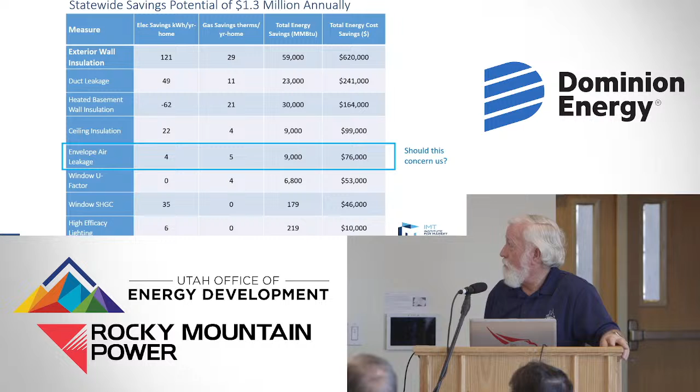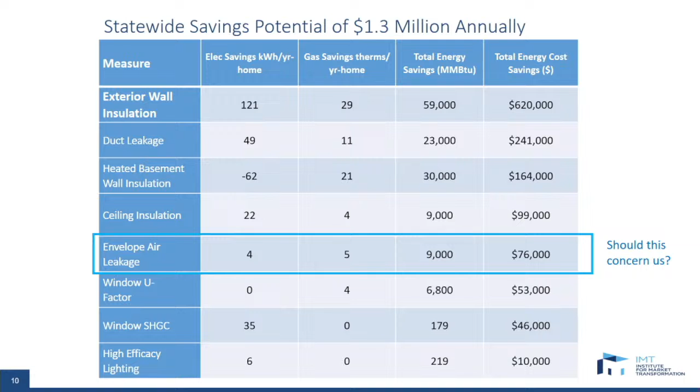That's a big savings annually. The thing I said should concern us is our envelope tightness was pretty tight. We were tighter than expected. So if our envelope's tighter than expected, how should that concern us? It concerns us because we're not ventilating them. We're not blower door testing everything.

There's a lot to it, and I'll talk a little more about that. But let's just say the amendments lessen the chance there's going to be mechanical ventilation, simply by the way they're written. So we're building a lot of houses that are tight, that no one knows are tight. We're not mechanically ventilating them, so we're trapping moisture in the houses. We're trapping contaminants in the house. We have poor air quality. And I don't think after what we went through the last few years that we really want poor air quality inside. I think we want better air quality inside, don't we?

Duct leakage is a big one too.

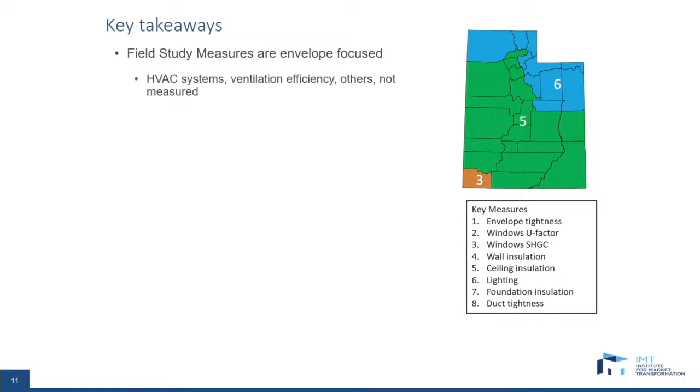So key takeaways: we need to focus. Well, number one, they did not measure HVAC systems or ventilation efficiencies and a few other things. Now, I kind of wish they would have looked at the HVAC more, but it's a little harder to measure and judge how well that HVAC system is performing. It takes a lot more testing and everything.

Exterior walls and duct leakage are responsible for 70% of the total savings, the potential savings.

Windows are getting better. When we first started getting serious about the energy code back in 2007, 8, 9, windows were not that great. We had lots of just clear double pane vinyl glass on the market, and low E glass was a premium. I built a house in '94, and I paid a big premium to put low E glass in that house. Moving forward from 2007, 2008 to now, if you notice the windows you put in today, the standard AMSCO or whatever window, instead of running 0.34, 0.35, is running what? 0.30, 0.31.

And that makes a big difference when you drop the U factor that much. So window technology has improved, it's not because we all did a great job in what we're doing, it's because window technology has improved. And no one even, if you went to a window supplier and said I want clear glass, I don't want low E, they're probably going to charge you more because they have to change production. And those things are fairly good.

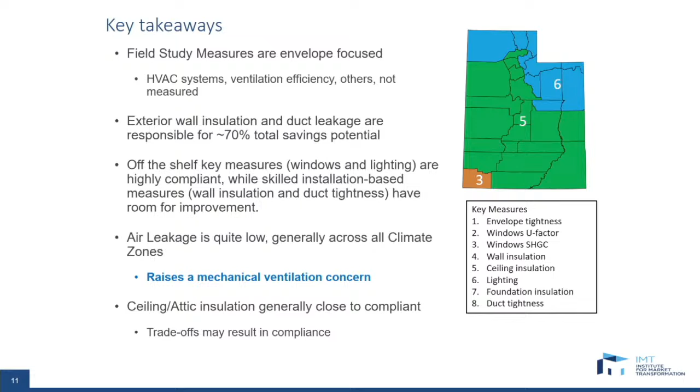Air leakage is low, like I said. Attics are generally close. And basement walls slightly fail to comply. We're just running off the screen just a little bit.

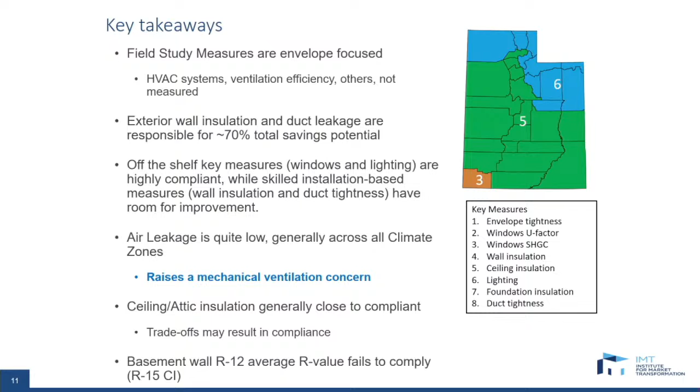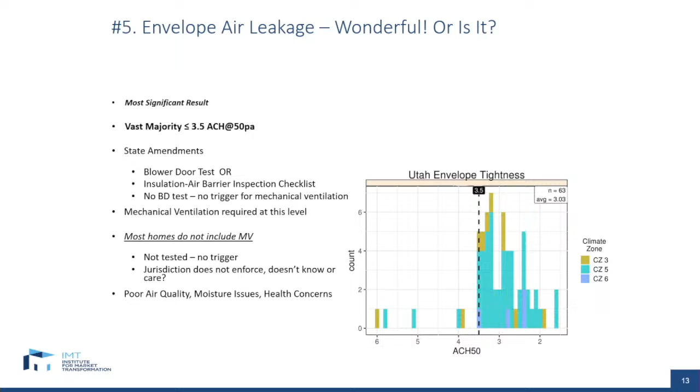The code without amendment, if we were on the 2015 code without amendments, it would say you have to mechanically ventilate at, anybody know what number? The trigger for mechanical ventilation in the 2015 code is 5 air changes per hour. As soon as you go tighter than 5, you have to mechanically ventilate. Our state amendment dropped it down and kind of stepped it down, and we're now at 3.5 is what we have to meet if you blower door test, but the trigger's at 3. So we don't have to mechanically ventilate until we hit 3 or lower.

Well, look, a good portion is flirting with that 3 number, and then a bunch is tighter than 3. How many of those do you think have mechanical ventilation? Don't know.

The code itself has 4 options to comply. I kind of like the energy code because it doesn't say you have to do this one thing. It says you can do this, or this, or this, or this. And in Utah we have a 5th one down at the bottom, and that's the Utah 2012 ResCheck, which allows us to put in that high efficiency furnace, which everybody's kind of doing anyway, aren't they, Ryan?

They are kind of doing that, but there is a problem. Hang on a sec, she's going to give you a microphone so everybody can hear. There's a lot of people doing that.

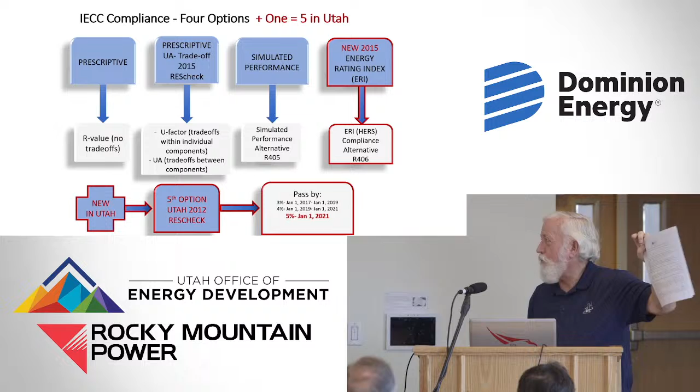So I'm going to real quick, and why I'm doing this, I'm going to grab Jeff's again. If you look at the checklist that I put together, the first thing on it for the most part is which option are we selecting. So before we went to that sheet, I wanted to review these a little bit so they were in your mind when we got to the sheet.

So real quick again: prescriptive just means you meet a table. ResCheck is a UA trade-off. Simulated performance is an energy model. You have the home you're going to build, you have a standard reference design home, you compare the two, and if you calculate that the home you're going to build has energy consumption equal to your standard reference or less, you comply with the code.

But you don't get to trade off a lot of stuff, do you, Jeff? No. And then the ERI, which was new in 2015, you get credit for virtually everything in your house. We're looking at the whole thing as an assembly, not just the envelope, not just the HVAC. We're looking at everything. And then we have, down below that, the 2012 ResCheck.

So just a little more background. The equipment trade-off was in the 2006 Energy Code. You could take that equipment trade-off, and it was in previous MECchecks before ResCheck. You could always trade off for higher efficiency furnaces and air conditioners. That was in the 2006. In the 2009 IECC, it disappeared.

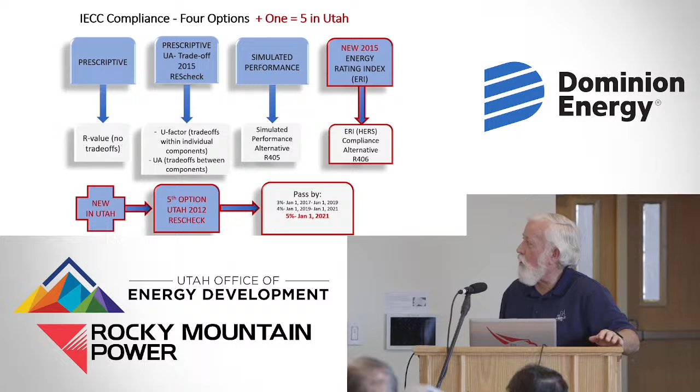So let's just real quick go through each one of these and talk about what each one of them is. As I said, we have 5 compliance options in Utah. The first one's a prescriptive table, and I'm sure most of you are familiar with that, but if not, that's fine too. That's why you're here.

It's simply a table. And if you're in climate zone 3, which is Washington County, St. George area, you just have to meet everything that's there. So it's a 0.35 window, a 0.55 U factor on a skylight, solar heat gain coefficient of 0.25 or lower, R38 in the attic, R20 in a cavity or R13 in a cavity, and R5 continuous insulation on the outside of a wall.

And St. George actually meets that quite a bit because they do EIFS systems where they put foam on the outside. If they put enough foam to get R5, then they actually build a pretty good wall. Mass walls we'll skip over, hardly applies. And a basement wall in climate zone 3, either R5 continuous or R13 in a cavity, and the same for a crawl space wall.

And then we have similar numbers for climate zone 5, which is where we are, and climate zone 6. But if you notice, climate zone 5 requires more insulation, climate zone 6 even a little bit more, especially in walls. So if you pick your climate zone and you build your house and it meets those values, you comply.

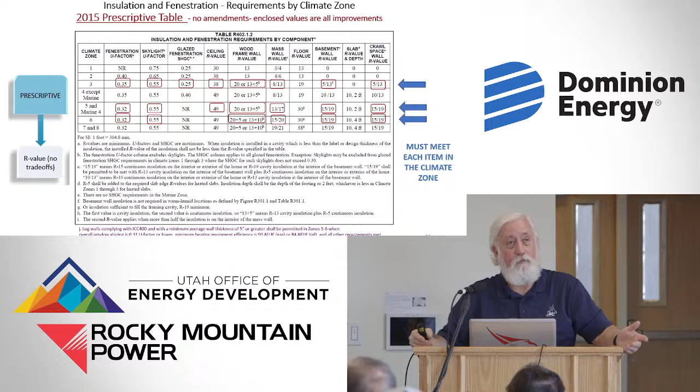The numbers in the 2018 code and the 2021 code are better than these. And so here we are, we're skipping and not adopting, and so the code is getting better, homes would be more efficient, and we're staying back here on this table.

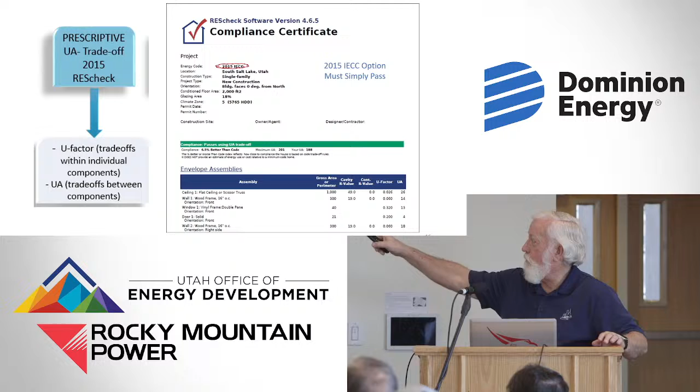REScheck, I think a lot of you are familiar with REScheck. Here's a res check done to the 2015 IECC, which is that option. And you simply have to pass. If you use the 2015 res check, you simply have to pass.

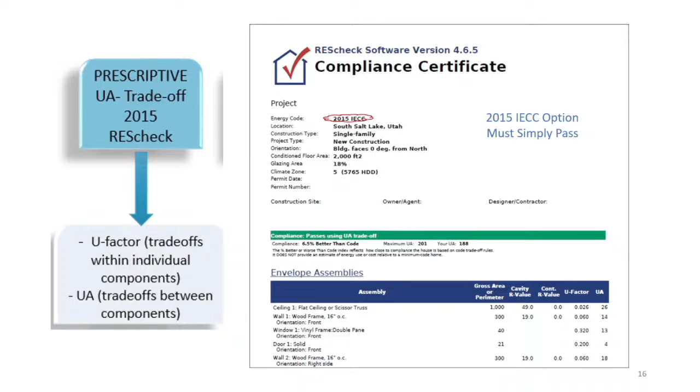The simulated performance, that's that modeling that you do. You just have to show that your energy usage is going to be less than your standard reference.

Now the ERI—how many are not familiar with the ERI? Good, thank you for being honest and candid. I'll bet there's more people that didn't raise their hand that aren't that familiar with the ERI.

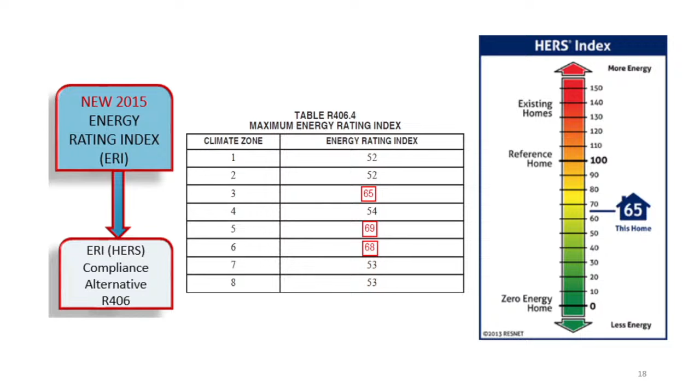It's an energy rating index. Now, when this was added to the code, they wrote up the criteria for this software, what it would have to do. And the only system available at that time that they could use was a HERS rating, a home energy rating system. Is that right, Jeff? So it's a score.

So when I say ERI path, I'm really saying a HERS score, because at this point I think that's the only system we have to score a home. Now, why didn't they just put HERS in the code? Because it's a private company that developed this, and they're not going to put that in there.

I've heard there is another system out there that's very similar that's going to be available, or maybe it's coming online. I don't know if you've heard anything. Well, there's a different software. ResNet, or RemRate, was the software company that did all the HERS scores at the time. Now Ekotrope does them, and a lot of guys are switching over to that, in fact. So there is a second one—there's RemRate, which is the HERS score, and Ekotrope, is that right?

Yeah. And it follows basically the code-identified criteria, so I think the scores should be relatively similar, shouldn't they?

But the beauty of this—I just love this—there are so many advantages. If I had a dream speech, it would be that every home in Utah had a HERS score or an ERI score. It would take all this arguing about the code and kind of put it on the back burner, because if your home had a good score, you'd make extra money when you listed it, because of your home's score.

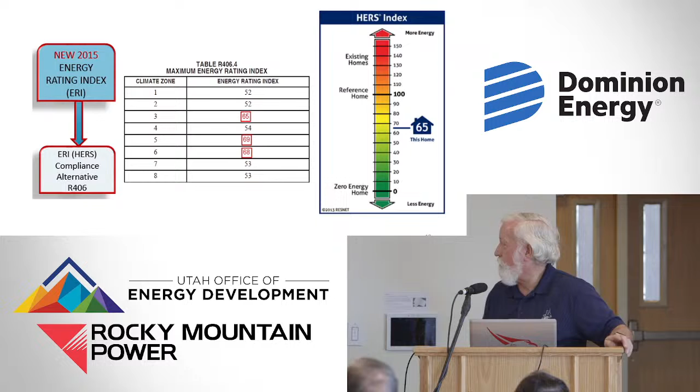So if you choose this, you're building a house, you identify how you're going to build the house, the insulation, your mechanical system, your appliances, and you project what you're going to use. You have Jeff or someone else, a HERS rater, run you a projected rating, and you submit it with your plans. Then when the home is done, Jeff will be coming by.

How many times would you go by for a HERS rating, if you're doing a new home? Well, if you're doing it for Energy Star, you have to do more time, but if you're just doing it for a HERS rating, basically... Hang on a sec, we're going to have you say it in the microphone. For Energy Star, you're gonna be making more trips to the house doing inspections. You have to do insulation. You do have a lot of the same inspections that the municipalities do. But just to get a HERS score, it's not much more than you're doing for code now, which would be duct blast testing and blower door testing.

Okay, so Energy Star's always required you to test all mechanical systems, whether in conditioned space or not, right, which is still a good idea, because we find a lot of leakage in quirky places. Sure, I've got a few builders have me test them all anyway, especially after they suck all the insulation into the return side and fill up the coils on a system that was all inside conditioned space. Right, right. Very good, thanks, Jeff.

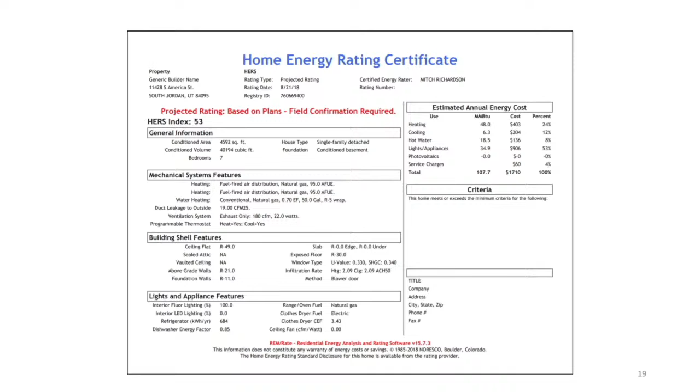Question is, when's this form generated? This form needs to be generated for plan review. So before you submit for plan review, you need to have selected your HERS rater and got him involved. He will generate this projected rating, and it'll say projected rating based on plans, field confirmation required. All this ranting I just went through was to say, we need the plans to actually be based on this, because they are so often not. Does that answer? So this one comes before you submit, then this one at final.

So does that mean every plan has to go through a HERS rater if you're choosing this method, or can the architect verify that this is the intent? Say that one more time so I can repeat it. Or wait a minute, she's got the mic right here. We got people online. Sorry. Before a plan submittal, if you're going this method, does that mean you have to hire a professional HERS rater, or can the architect generate this? If you, plan designer, use HERS, you're going to have a HERS rater for every home. Okay.

I was just gonna say, so for the second report, how does the HERS contractor, or whoever does it, actually verify that stuff? Are they coming to each inspection to see these things as they're being installed? How are they gonna know what's in the walls? They don't inspect insulation, right, Jeff? Well, on a lot of it we do, but a lot more detailed than what a building official would, because we have to actually grade the insulation for, like, Energy Star. If it's Energy Star, yeah, they come out, they grade the insulation, they make sure that it's installed correctly and everything.

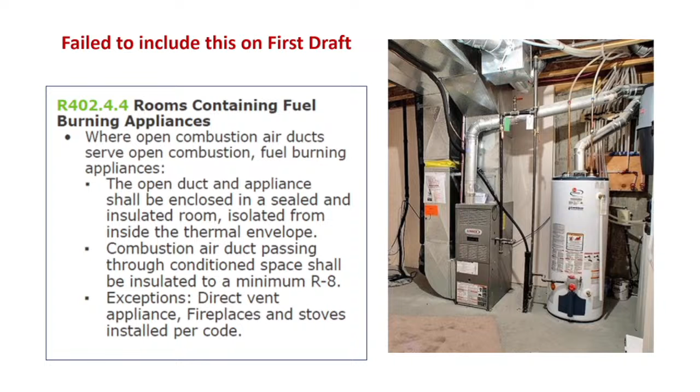I can't believe, did you have a question? Or are you just stretching? Yeah. I admire all you guys. You're the ones that have to sit there and listen to me. I can kind of move and everything.

I wrote this code change. I took it to ICC, I put it in the code, and guess what I did? I left it off my checklist for today. So, what does this basically say? I'm just going to summarize real quick. For years and years, in fact, it goes back into the 80s. I remember Questar, it was Questar at the time. They used to be really involved in our HVAC systems. Brian remembers this probably.

In fact, I would do a system. I put in the gas line, we'd pump it up, test it and everything, we'd leave it on a home. And Questar would come in and disconnect the gas line from the furnace, and they would pump up the gas line and double check and make sure the gas line didn't leak. And then they'd set a meter.

And if the furnace is installed and stuff, they would come in and derate the furnace. Peen the orifices, derate the furnace, take care of everything. They'd do an inspection for combustion air or whatever the case might be.

I still remember I was in a subdivision. I'd done like 8 homes over on 13th East and about 47th South. And they came in, I think this was early 80s, and said you have to put combustion air in everything now. Two of them, high and low, and if it's horizontal, it has to be big enough your dog and cat can go through it at the same time.

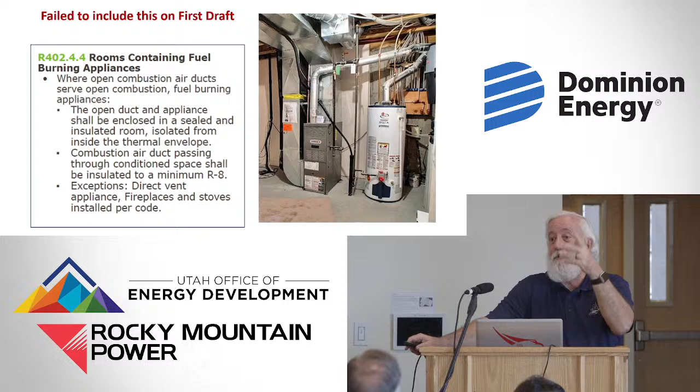If some of you have an 80% furnace, you know what you have to do: go down, take the little rod out, polish it up with a Scotch-Brite or something, put it back in, and your furnace runs fine. It's because it's getting contaminated with the crap you generate in the house, especially laundry stuff, detergents and dryer stuff, fabric softeners.

Just make it direct vent. Guess what? If you put in a direct vent furnace and a direct vent water heater, and you put in a 700 CFM range, and we adopted the current code, you don't have to put makeup air in for your range hood. The whole reason we have makeup air for a range hood at 400 CFM or greater is because you backdraft the B vent, and it's dangerous.

If you put in direct vent appliances, you don't have to deal with that. Now, your range hood's not gonna work real well unless you crack a window or something, if it's a big one. But combustion safety is paramount. Plus there's rebates. Plus there's rebates.

And while I'm on it, I'm gonna jump on the next soapbox. Builders, HVAC people, please, please run the second pipe. If it's a direct vent, install it direct vent. Install the combustion air pipe coming in. Don't draw from inside.

Climate zones. How late are we supposed to go? We might finish early. Anybody gonna care if we finish early? Yeah.

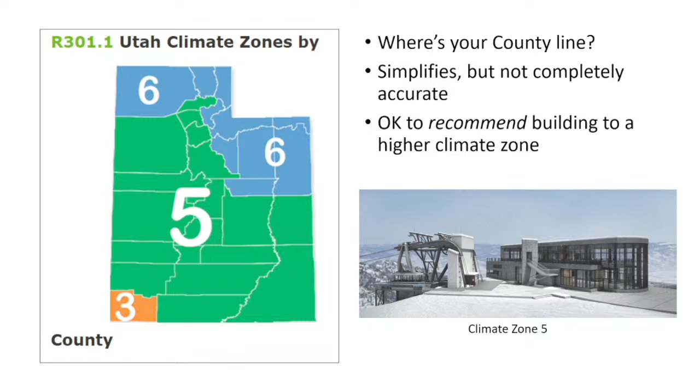Climate zones in the 2021 code change. Up in Box Elder, Carbon, and was Cache one of them? Or did Cache stay climate zone 6? Anyway, three counties moved from climate zone 6 to climate zone 5 because historic weather data shows they're a little warmer than they were before. And so they changed. Hasn't changed for us because we're still on this code.

Now, I worked for Salt Lake County. I worked for Salt Lake City for a little bit, but then Salt Lake County. And we did a job, this building. We inspected this building. Anybody know where that building is? Top of Snowbird. You probably went out there, didn't you, Mark? Or were you not working there then?

It's 11,000 feet. What climate zone is it? What climate zone should it be? 7.

In fact, the Utah County line is that way, and is it Summit? Yeah, Summit County, within a couple of hundred yards of that building. It's the same as Sandy, that climate zone right there. Same as right here. It's our climate zone.

It's Salt Lake County. Now, should we change it back to how the climate zones, the 17 climate zones or whatever it was in the 2003 code? No, because it was so cumbersome. No one enforced the code because it literally changed with the street, you know what I mean? It's based on heating degree days and cooling degree days, that's where your climate zone comes from.

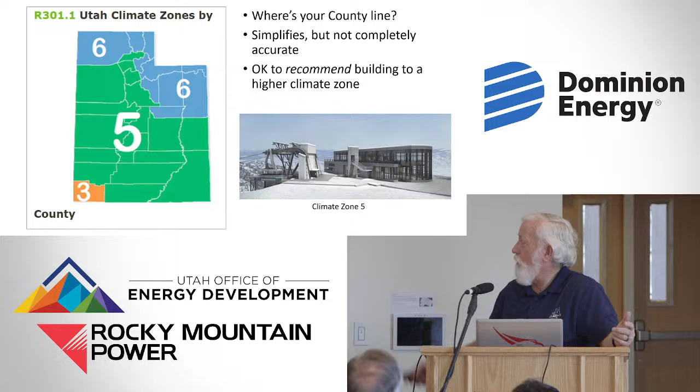It's never gained traction, and so I think it was about 1.5 to 2 years ago, ResCheck was updated so it matches what the code says. And the code does not allow you to trade off slab edge insulation in a UA calculation. What I'm saying is, if you build slab on grade, you have to put slab edge insulation in, unless you do an ERI, a HERS rating. You can trade it off with the HERS, but you have to put in slab edge insulation.

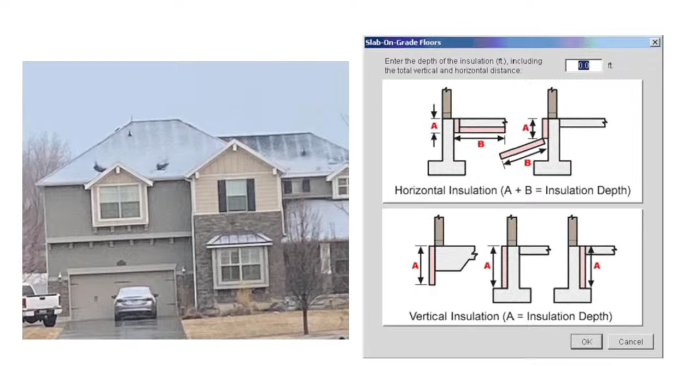They are not, as far as I know, having ice dam problems, but their neighbor right next to them, and a couple more down, is. Not only is this an energy waste, does it contribute to ice damming? Absolutely. If it's cold outside and this is frozen right down at the eave, just under the soffit, we build up ice there, and this melts it and feeds it down, keeps building up the ice - what's going to happen? It backs up under the shingles, and there we go. Even that OSB sheathing or plywood on the inside is going to have water condensing or freezing, because it just goes on and off, and you'd be rotting that plywood out.

Yeah, we have condensation issues, we have everything else, high heel trusses - but the real thing is, I don't know if my friend Jason from down in St. George is online, but he called me up with an HVAC contractor on the phone. I was getting so frustrated because the guy was arguing that he only had to insulate the round pipe and the rectangular duct, not the other components like the return boxes - he'd put little square J boxes, run a 12-inch across the attic and take 5-6s off it, and he didn't want to insulate them. He was trying to argue the code didn't require it, only the round pipe.

Down there it's heat gain, huge heat gain. Here it's heat loss. And our duct insulation requirement is already ridiculously low anyway. Here comes another soapbox - if you're in St. George, what's the temperature in the attic in the middle of the summer?

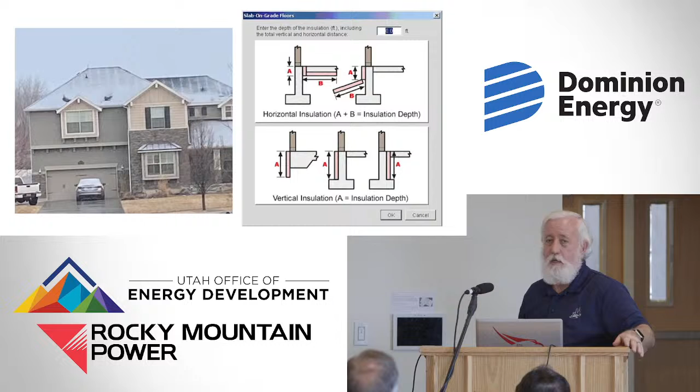Any other questions? The discussion's great, appreciate it. I didn't want to have to go through this formal set of slides and not have any input from you.

This was brought up earlier, and you might have brought it up, Jeff, because you look at this with Energy Star. How many times does it say in the IRC manufacturer's installation instructions? Anybody have an idea? I think I counted it, and that was 137 times. In all the I codes, I think it approaches 1,000 times.

Why does the code refer to manufacturer's installation instructions? You can't put everything in the code for every single piece of equipment. So the manufacturer, when they build a piece of equipment and have it listed, they do the testing and listing based on a specific installation procedure. And so the code refers to manufacturer's installation instructions. Manufacturer's installation instructions are part of the code.

Just like Manual J is part of the code, what's the concrete standard, 318, is part of the building code. These are all reference standards that are referenced in the code. They're part of the code.

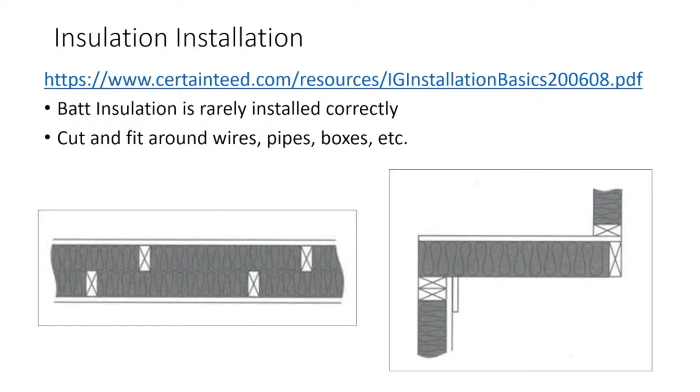The manufacturer's installation instructions for batt insulation is different than what we see installed. And why is it installed wrong? How many code officials... let's be brave. I know a bunch of them that aren't raising their hands. Jason's raising his hand - because we let them install it wrong.

When I was working for Salt Lake City, in 2005, I went out on a house that they had insulated. They hadn't even attempted to cut around a box. They just shoved it in all over the place, and I failed the inspection. The builder called me freaked out of his mind that I would fail an insulation inspection. No one fails an insulation inspection. I wanted to say, well, it's your lucky day, dude, but I didn't.

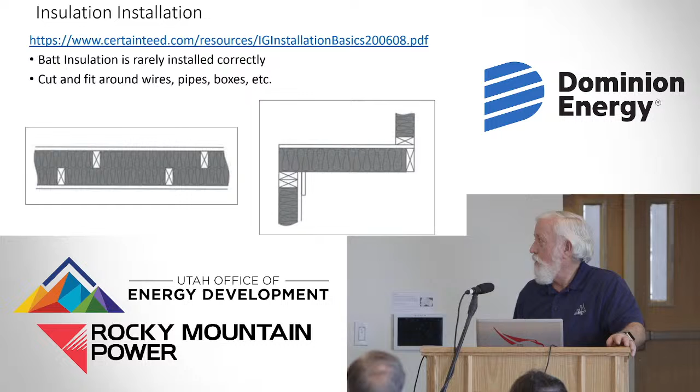You can see that stuff with a thermal camera - it's just horrible how bad it is and how much heat loss and heat gain we have through that crappy insulation installation. The manufacturer says that you have to cut and fit around wires, pipes, boxes, etc. You need to split it for wires, you don't tuck it underneath there. It needs to be cut and fit in back around the box.

I've had a lot of insulators say that if you're going to make me do it like that, it's probably just as cheap for you to do a BIBS system. And guess what? It is a better system. They can get R24 in a 2x6 wall with a BIBS system, and it fills up all those little spaces that we miss.

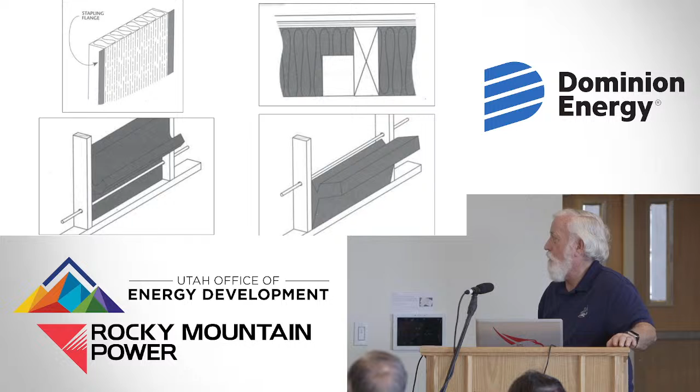Service water heating - we're almost getting to where we're just going to talk about the sheets that we prepared. If you have, and I know this gets missed so much, we need to pay a little bit better attention. Lots of times these are not put on the plans, but if they have a recirc pump on a water heater, the energy code requires the loop to be insulated. Why? Because anytime that pump's running, it's just a radiant heater around there.

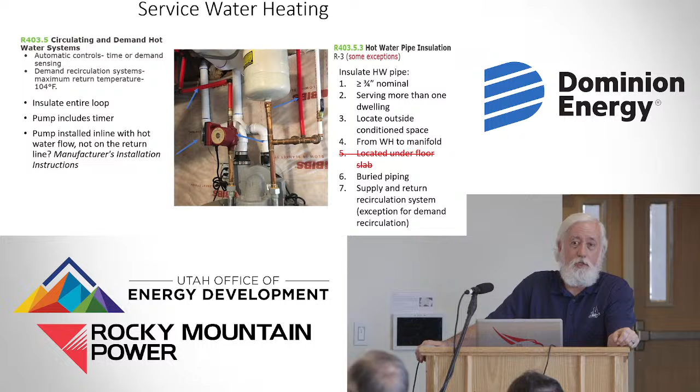Hot water pipe insulation - how many of us, myself included, ever enforced that? It says if it's 3/4 inch or larger hot water line, it needs to be insulated. Now, I'm not saying to code officials, go out and hit everybody over the head. But at plan review, if you choose that you're going to enforce this, and we ought to be working towards that, we should be bringing it up at plan review. The code says anything greater than or equal to 3/4 inch nominal pipe is supposed to have insulation on it.

Commercial, it's no big deal, we just insulate all the hot water lines. If it's serving more than one dwelling, could that apply nowadays with all the ADUs that we're putting in - the accessory dwelling units? Of course, located outside the conditioned space, from a water heater to a manifold.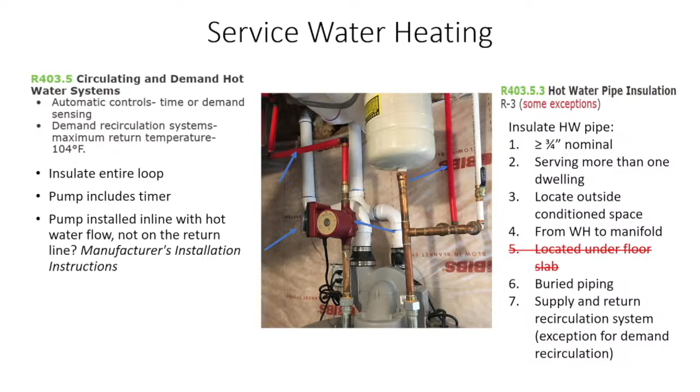Located under the floor slab is crossed out. Why? State amendment. Builders in Washington County say, oh, that costs us too much, it's too time consuming. How long does a piece of PEX running in the ground from a water heater room in St. George to the kitchen sink or to the bathrooms, how long does it maintain hot water in the pipe after you stop the flow when it's in the ground?

A minute? The ground sucks the heat away at a much greater rate - I think it's 6 or 7 times what it does in air. That's why we use ground source heat pumps. They put pipe in the ground to suck the heat out of the ground because there's good heat transfer. Anyway, that's on my list there.

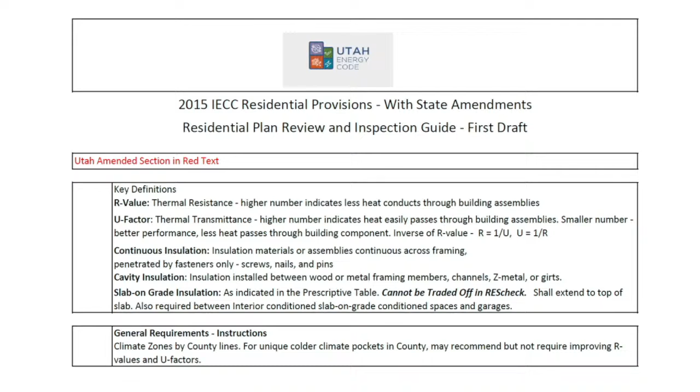So if we look at this sheet, I don't need it, Jeff. I've got it right here. My key definitions: R value, thermal resistance, higher number means less heat conducted through the assemblies. U factor, thermal transmittance. So that rebar, and I ought to look it up so I know next time, or that piece of duct has a high U because it really transfers heat well. It's probably 4 or 5 or 6 or 10, I don't know, but it's a high number.

If you take the U, let's say we know the U of a square foot of that wall. If that was an R10 wall altogether, then the U is going to be 1 divided by 10. The U is going to be 0.1, okay? So we have a 0.1 U on that wall, and we have 1 square foot. If I take 1 square foot times the U, 0.1, what do we get? 0.1. 0.1 BTUs will go through that square foot every hour.

If we have 10 square feet, then it's 10 times that, right? So a large U, say the U is 10, and we have 1 square foot. Then we have 10 BTUs going through that 1 square foot. So the higher the U, the more BTUs are going to flow through the wall. Times the delta T. So it's U times delta T is the amount of BTUs that go through 1 square foot.

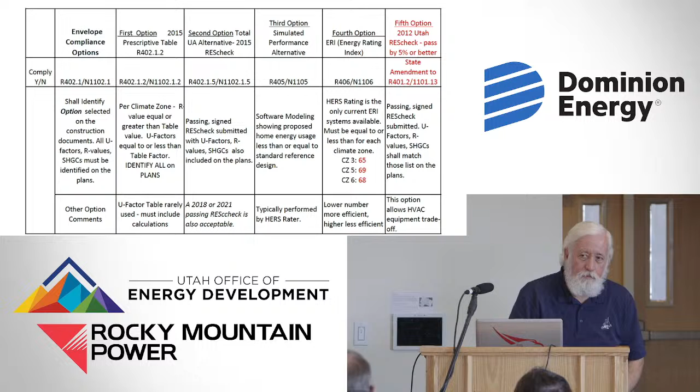So anyway, I welcome your input on that chart. The first thing, verify, have they picked a compliance path? Sorry, on the 2012 Utah REScheck, multifamily, do you input per unit or building as a whole? I've heard both. And when you say multifamily, is it townhome or is it? Well, correct me if I'm wrong, if it's over 3 stories, it's considered commercial, is that correct? Yep. And it would fall under COMcheck? Yep, exactly.

But the thing is, I'm trying to remember if REScheck allows you to do multi. It does, doesn't it? So it has 2 tabs on it, one is for single and 1 and 2 attached, and then multifamily. So if it's anything bigger than a duplex, like a townhome with 3 or 4 units, it's multifamily, and it doesn't allow you to run anything but the UA trade-off. You can't do a performance alternative. Right, in my understanding, it's the shell, not individual units. Right, yeah.

So it's just an envelope. That's all. Like he says, it doesn't allow you the options. You can never use the equipment trade-off because you can't do a REScheck with more than one piece of equipment, one system. REScheck doesn't let you do two systems.

Now, I've accepted it before if both systems were the same. Both were 96% efficient, both were 14 SEER air conditioners and stuff. But technically, REScheck does not allow you to do two systems. Yeah, or use the worst one.

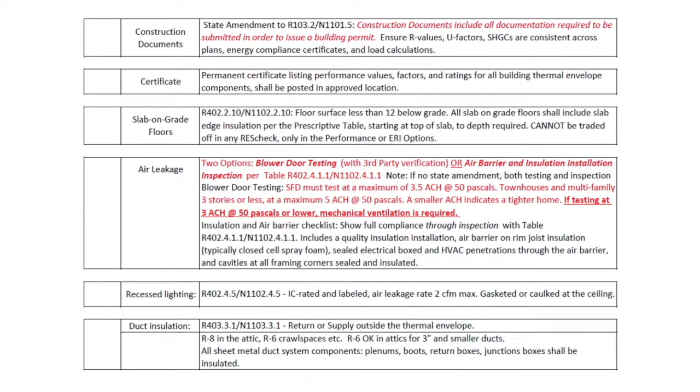Recessed lights are supposed to be gasketed and sealed and all that. If you have registers coming out of your ceiling, like my neighbors and everything, they're supposed to be caulked and sealed or taped.

Ducts outside the thermal envelope, if it's in the attic, it has to be R8. If it's in a crawl space, R6. R6 is okay in the attic for 3-inch and smaller ducts. So if you have one of those high-velocity systems, that can be R6, but hopefully they're burying it in the insulation. If you have a chance and you're a builder, go to the 2018 and 2021 code and look at what they're talking about for encapsulating ducts.

If you have to have ducts in your attic, let's make an effort to get it down in the insulation. Any jurisdiction out there listening to this, please do not make them hang their duct up out of the insulation.

I know the theory is, well, I don't want to lose that R38 value, but what you're doing is exposing the whole circumference of that R8 flex duct to 150 or 160 degree air. At least if it's down in the insulation and just a little bit of the top's exposed, we don't have near the heat gain that we do otherwise.

That's hot here in the valley too, because we have asphalt shingles. In St. George, asphalt doesn't melt off the roof, but I had my roof replaced a year ago, and when they did it, I had them add some extra attic ventilation. Before I had my roof done, I measured 147 in mine. And I face north and south. I don't have a west-facing flat roof system.

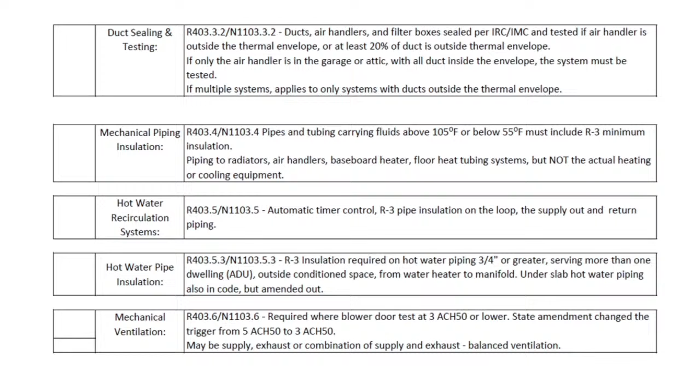Duct sealing: if you have at least 20% of your duct outside the thermal envelope, it has to be tested. Jeff talked about that. We pressure test the duct system, measured by lineal footage of duct length. If there are multiple systems, like a 2-story house with 2 systems, and the upper system is in the attic, just count that system. Don't make them test the main floor system that's all inside the envelope.

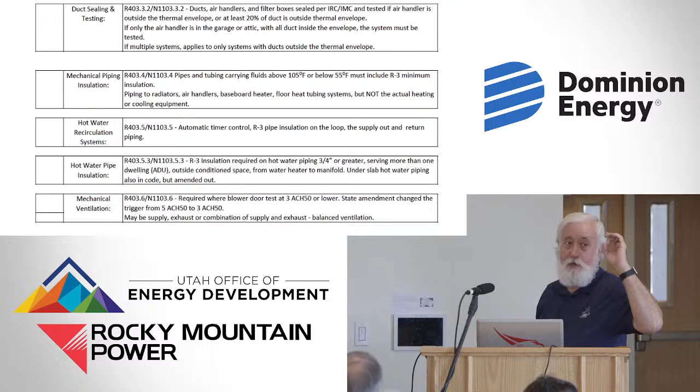R3 insulation on that pipe loop, we talked about that when we went through that, for 3/4 inch or greater, and I just kind of listed those things. So as you're going down the plan review, you just look at those things. The plumbing code requires in most cases now that you bring 1 inch into the water heater. When we hit the water heater, we might drop to 3/4, but out of the water heater, we should still be insulating that.

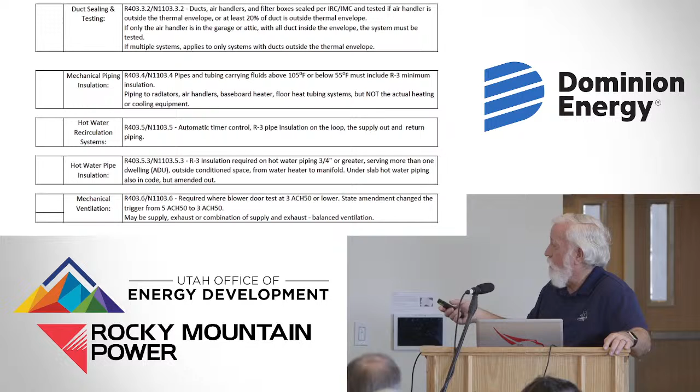Mechanical ventilation, we've just talked about that, the blower door testing and the triggers for mechanical ventilation.

One thing I need to add, in red text there: in the 2019 session, the legislature adopted the tables from the 2018 IECC that say if you put in a fan for mechanical ventilation, it needs to be a high efficacy fan. It has to have a DC motor. You can't put in a cheap $13 fan from Home Depot and let it run all the time - it would probably fail because they're noisy, cheap, and draw a lot of power. So you can't use a cheap fan for mechanical ventilation.

What I'm seeing accepted is sometimes the inspector will do the blower door test, and 99% of the time they don't even notice that fan issue. So if builders do notice, they'll have the electrician take the light switch out, hardwire the fan on, put a cover plate on it. Now that fan's running continuous until the inspection's over, then they put the switch back in - but that's another story. And they're noisy as could be, and usually don't even vent air to the outside of the house. Yeah, I could do an hour on bath fans and flex duct and everything.